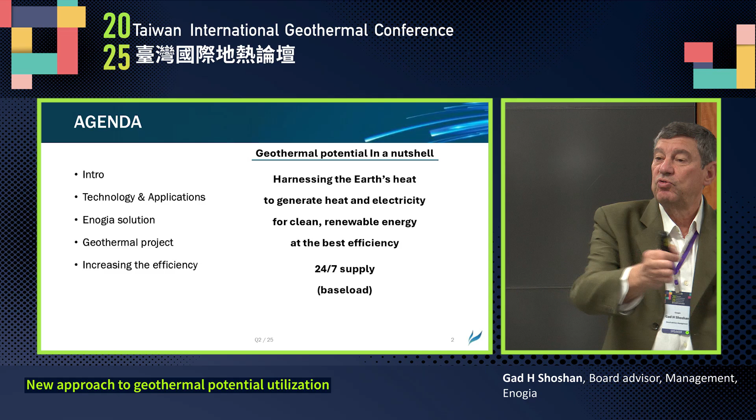I would like to start with explaining to you what is going on in the markets that we are in, which is the electrical market. Because if we don't have the wide scope, it's very hard to focus on where we can benefit. So we are right now in the middle of a revolution of the electrical market, or the energy market generally.

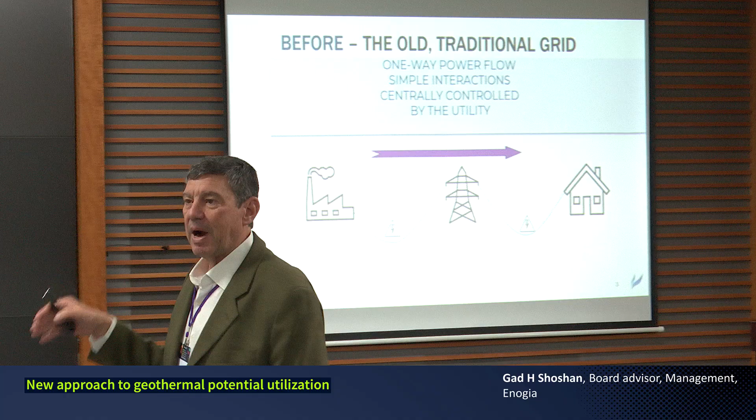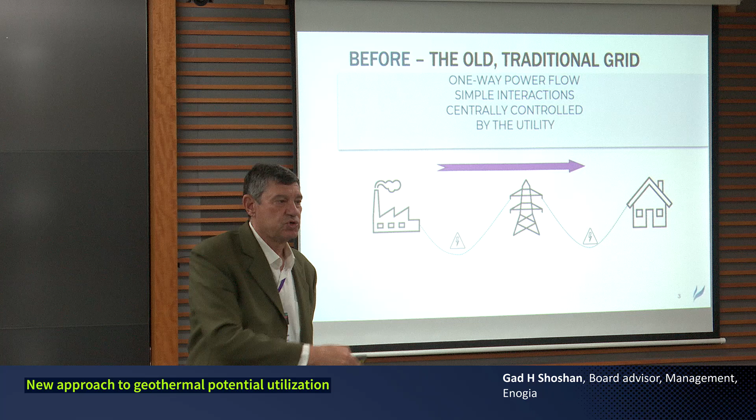We used to have the old traditional grid with huge power plants pushing everything into the consumer one way, and it is gone. The introduction of renewable energy, the diversification of production, the liberalization of the markets are changing the way we are doing business.

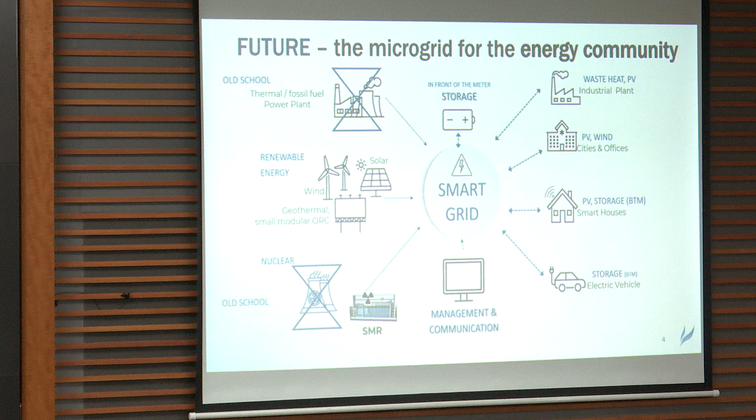Today, and especially tomorrow, what the market is going through is a concept of microgrid and energy community. You will hear more and more talks about energy community, about a group of people with a common denominator of energy production, energy consuming, and how we can help them to make sure that we are keeping diversity, efficiency, and resilience to our customers. You'll see this in a moment.

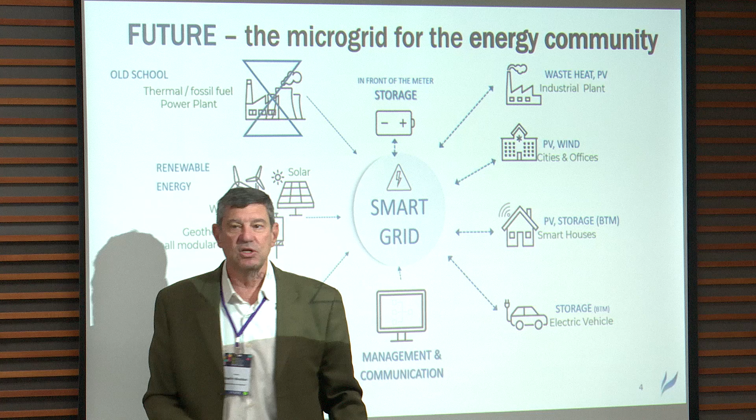The smart grid collects different kinds of production and takes into consideration the other side, which can also contribute to that. It's not anymore one way. It's both ways, and very interestingly, more and more the electrical car is becoming a player there as a storage source. Think of it, it's again a very wide version of it.

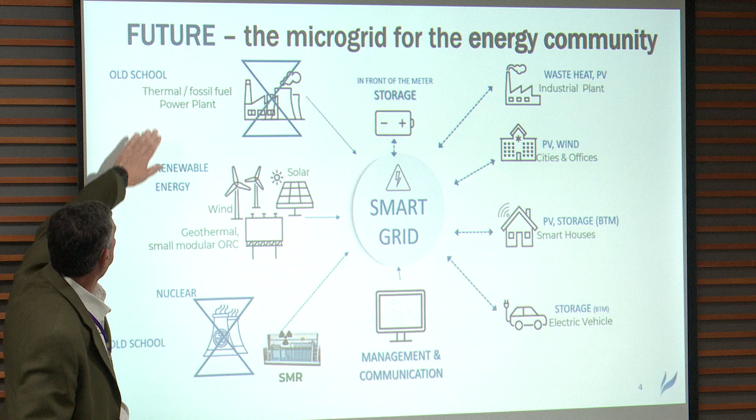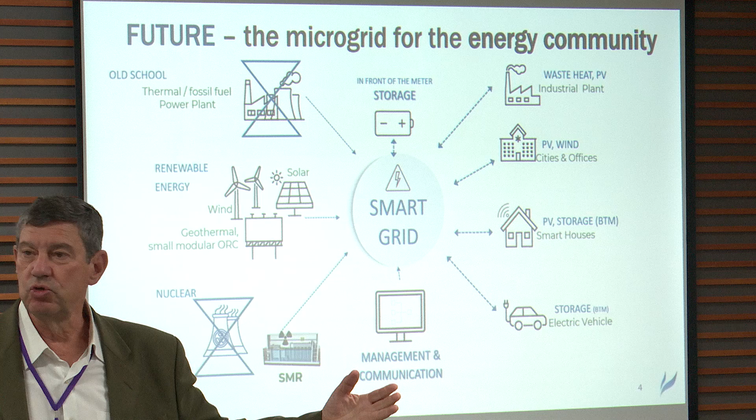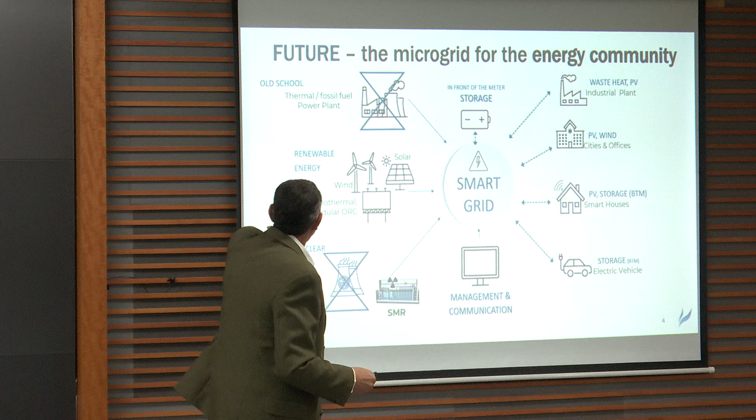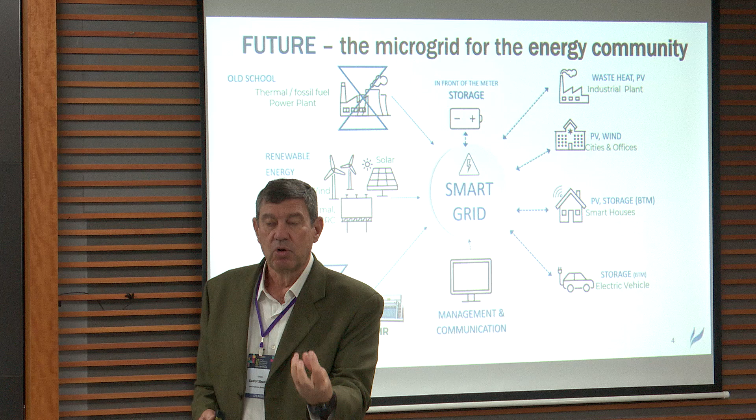It is here. You will meet it more and more because this, plus the geothermal small modular ORC, are going to be the pillar of this new smart grid. They're going to be the base load, because all the rest of them are not base load, and you need to equalize and stabilize the network. So, geothermal is a true base load and can replace or enhance wherever applicable.

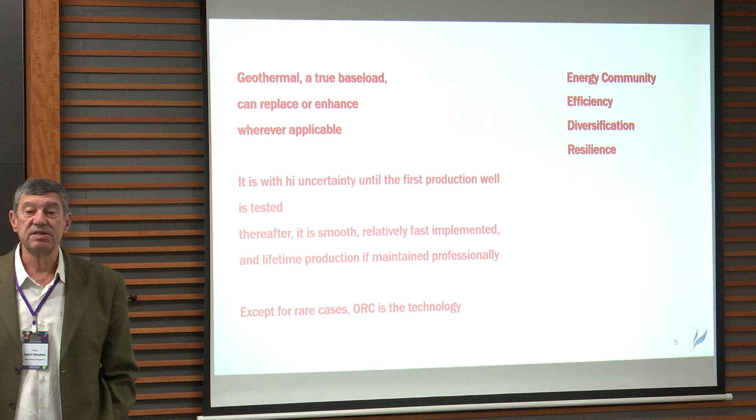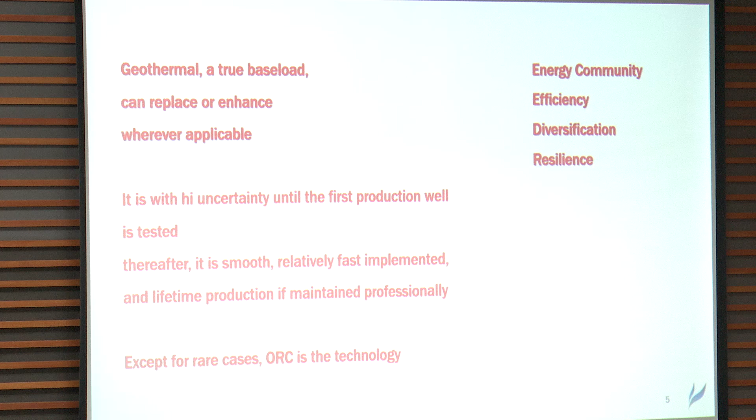Unfortunately, you can do a geothermal power plant only where there is geothermal. Yes, we all talk about AGS and EGS, and definitely it's going to be a valid solution sometime in the future when it will also be commercially available. We are getting closer and closer to that, but we are not there yet today.

Of course, the uncertainty is until the first production well. There is a lot of talk about this. I will not stay too long on this, so we don't have too much time.

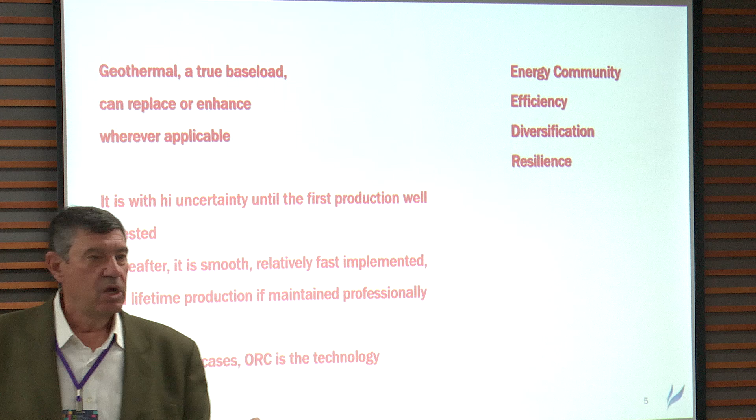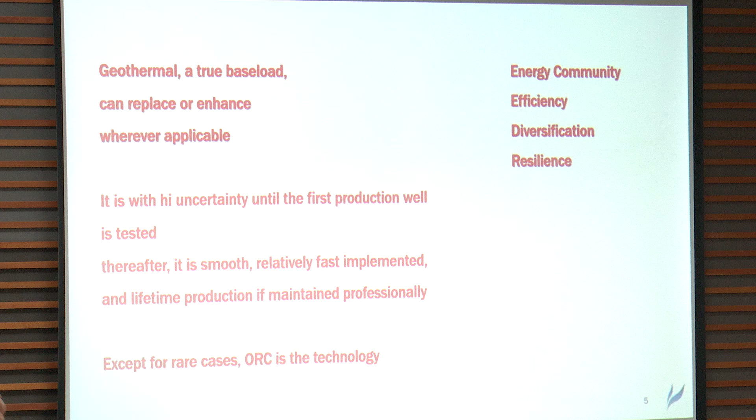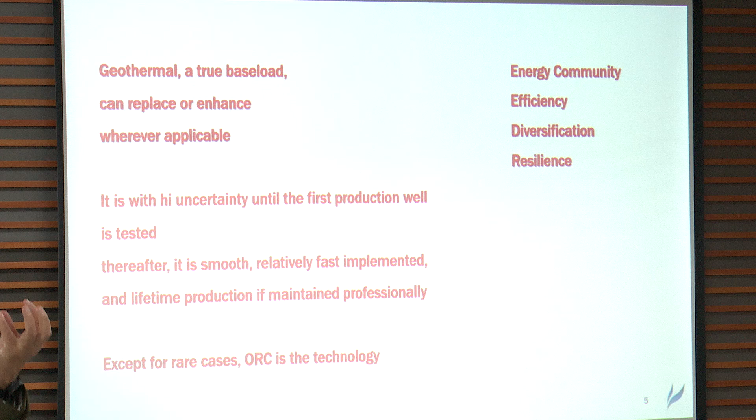Except for rare cases, ORC is the technology for geothermal. You will not find today a real flash system, definitely not a double flash system, utilized in the geothermal area. In New Zealand, which was the biggest area of double flash, you don't find it anymore. They're going for ORCs, some of them big ORCs like Ormat in Tamariki and others like that. Iceland is one of the only places where you can really find good steam that can operate a big geothermal power plant in a reasonable economical structure.

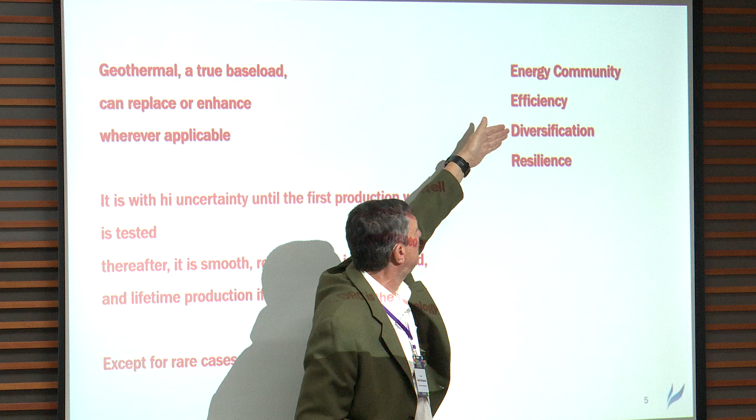So what we're talking about today is about an energy community. We're talking about efficiency, diversification, and resilience. And we are talking about how geothermal is poised to support this kind of structure, which is the future structure of the electrical market.

When we are drilling and investing in a well, the highest cost investment and the highest risk, what we would like is to have efficiency. We would like to have as much as possible from what Mother Earth gives us. And according to the depth and the temperature, we are going to have a lot of applications. It's not only electricity, and it is wrong to think that if we have geothermal, what we should do is electricity. No, what we should do is make an efficient combination solution to what we are doing.

I'm just putting here as a star the MED desalination process, which can be very easily supported by geothermal for island cases where they need fresh water, for agriculture or potable use. This is a very interesting solution. I'm pushing this for quite a while with the Greek islands, which have a real problem. I don't know, I guess in Taiwan you have enough fresh water, you don't have this issue, but it's also one of the applications for geothermal.

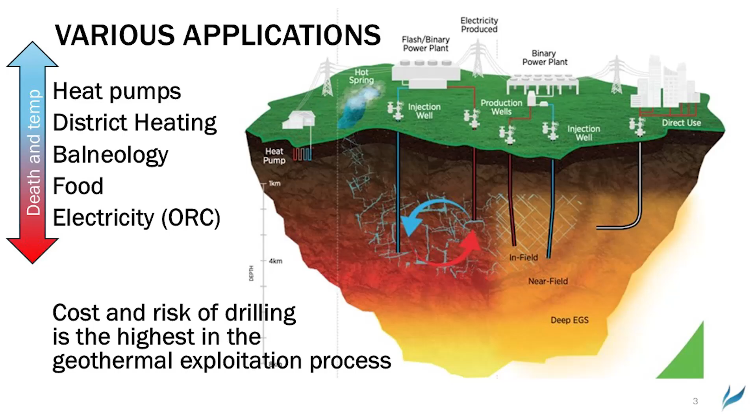So when we are developing a geothermal resource, we would like to prefer a multi-application solution. We would like to maximize the efficiency of that. We like to involve and support the local communities.

It is crucial, again, to think of the big picture. You are coming and drilling and building a power plant. It's not anymore a huge power plant somewhere where the government says, forget everything, this is the land for us. No, those are small power plants next to the communities that use them. And you find a lot of rejection because it was not explained, it is not educated, it is not brought properly to the communities, they don't understand the benefit.

Part of the efforts that companies like Enosia, like Turboden, like Ormat are taking into consideration. I know for sure, I mean I know less about Turboden, but I know Ormat, I worked there for 20 years. I know Enosia as a consultant. Community must be taken into consideration when you are developing a geothermal power plant.

You have to maintain the resource control. If you are not maintaining your resource, your geothermal project will not work properly, and you have to minimize the environmental disturbance.

We also know each well is different. Therefore, each well has to be considered for the multi-application, for the efficiency, a little bit differently. And you need the knowledge and the expertise to do that. Every well most likely can provide the multi-application, so you can do this.

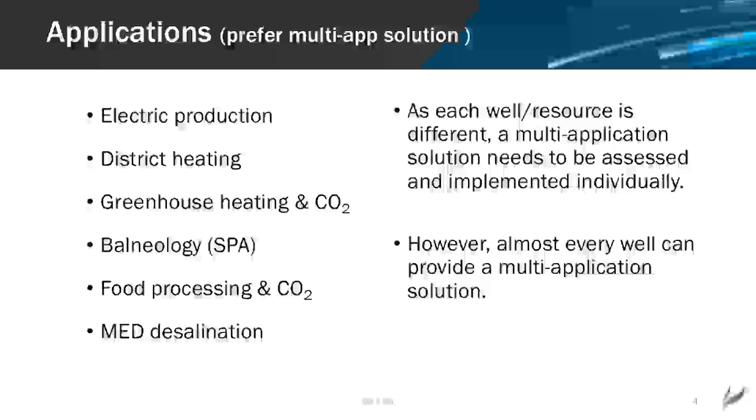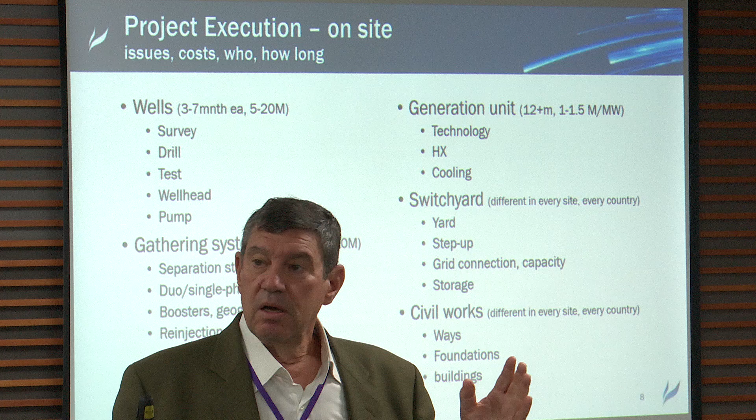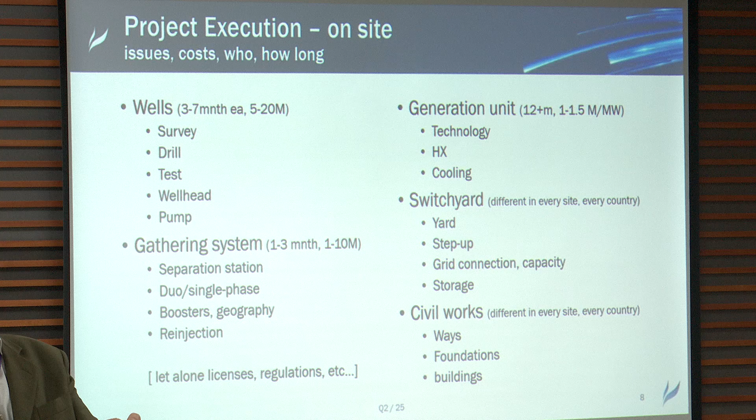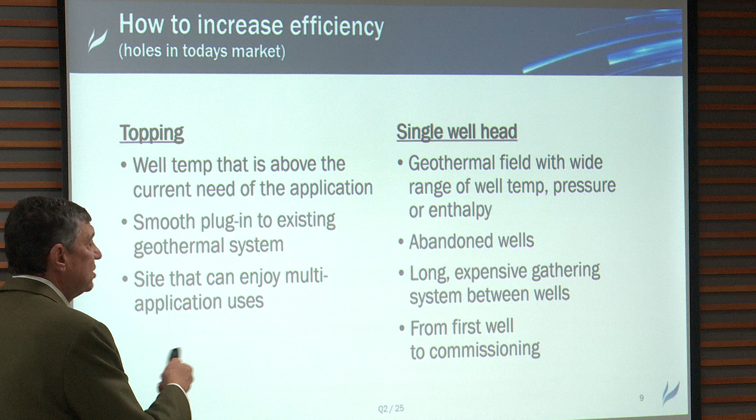Very briefly, what you can expect on project execution as far as time and more or less average cost in every phase of it. What I want to say in this slide is developing a geothermal power project is multidisciplinary, quite expensive until it is working. Once it is working, it's a honey bunny, as one of my Turkish customers used to say: I'm sitting with my legs out and just rolling the dollars like that, once it is running. So if it is properly designed ahead of time and properly executed, this is the best solution that you can get. This presentation will be available afterwards to everybody, so you can read more of that.

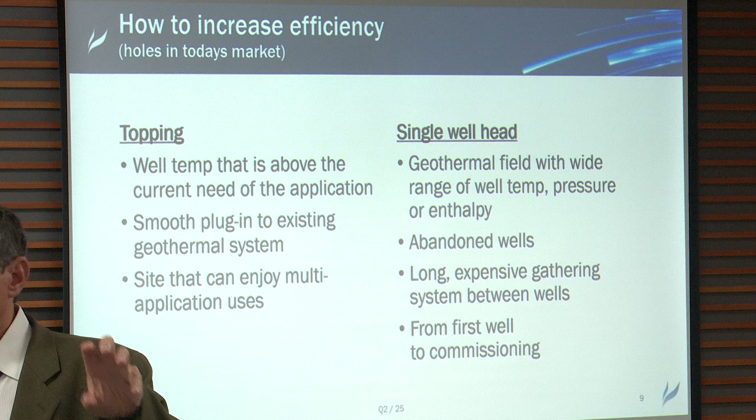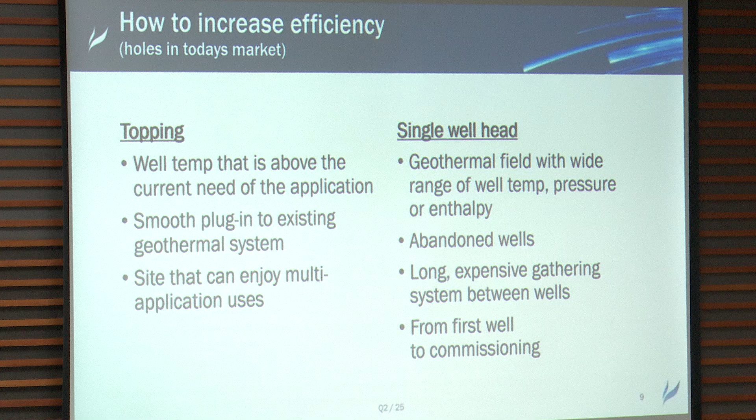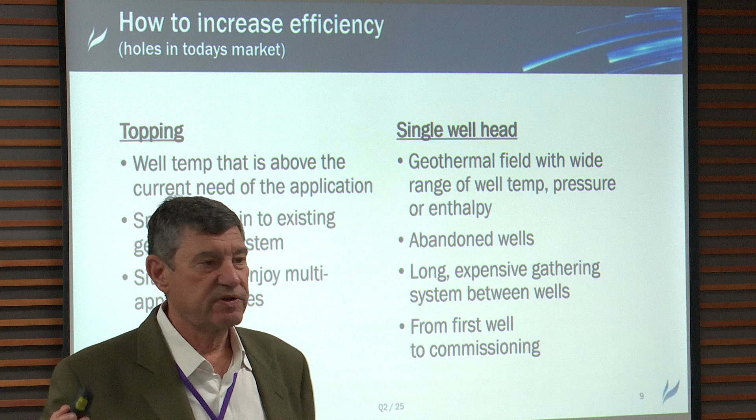So what have we developed at Enosia to suit the needs or the black holes that we found together on the geothermal market? In a moment I will tell you why the Enosia solution suits them. But we found two areas where you can quite easily do more with what you have, or what you are about to have. One is what we call topping. In many cases, you have existing wells serving existing applications where the temperature is above what you need. District heating, you need about 75 to 95 degrees to support the district heating.

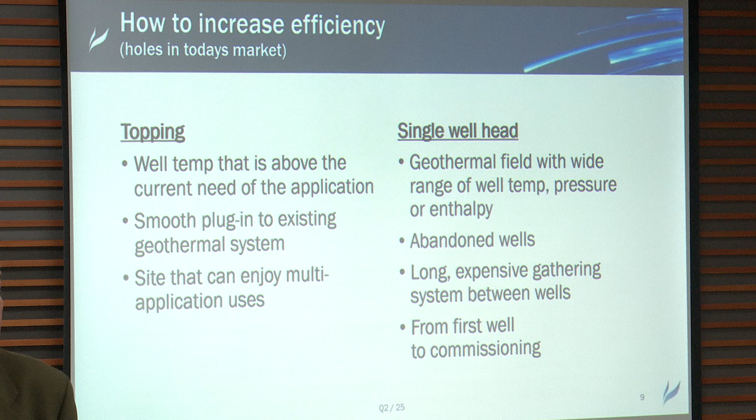I've seen wells in Iceland that are 125 degrees. For district heating, they are cooling the brine in a pool from 125 down to 95, 90 or 85, whatever they need, to suit the needs of the district heating.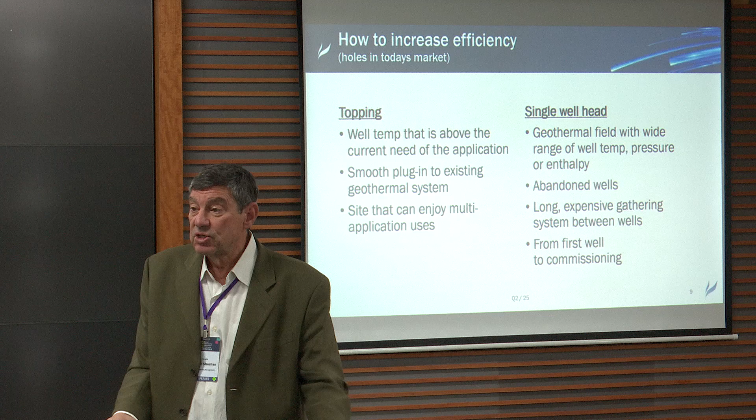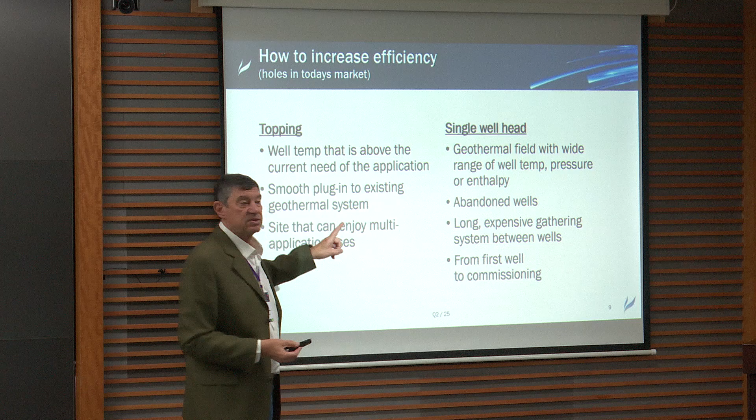Guys, you just wasted 5 megawatts of electricity here. This exists and it's very easy, a very smooth plug-in into existing geothermal systems. You just put a unit on top of the well, and instead of just cooling it, make electricity out of it.

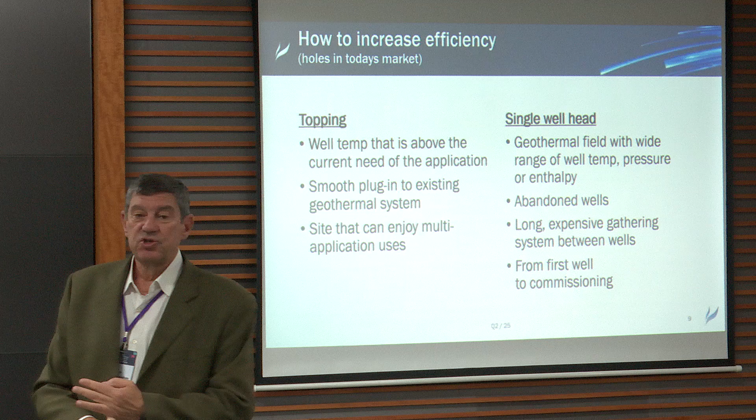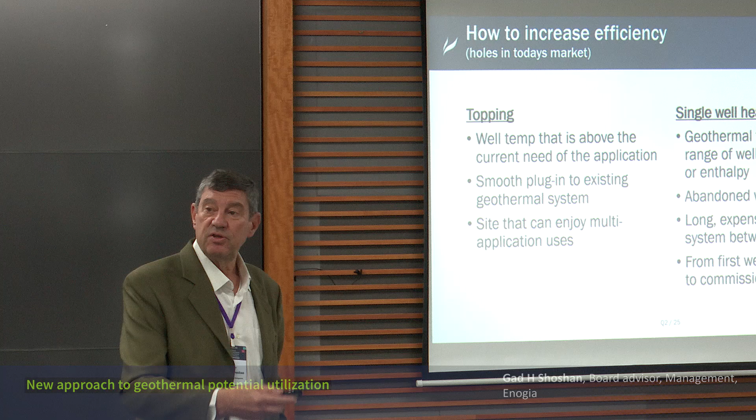True for the onsens we've seen all over Japan and spa facilities. Ormat has a beautiful solution like this in Bad Blumau, Austria, where a well supports about 200 kilowatts of electricity to the hotel, from their district heating to the spa. This is the best efficient solution I've seen in the world until now.

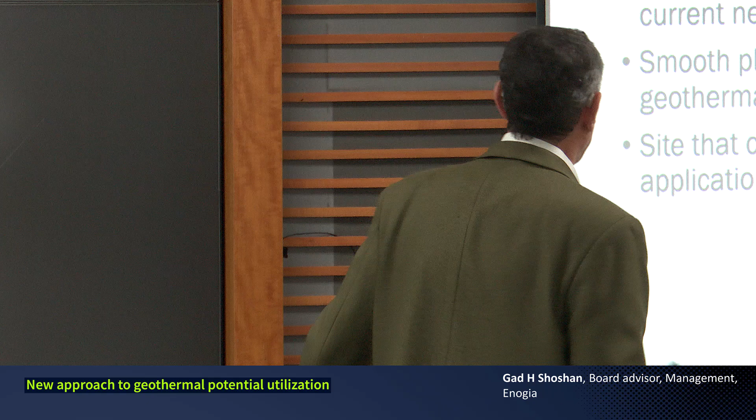We are offering something like that, very easy to implement, and it immediately joins the multi-application approach. Why is this important? At least in the EU, sites with multi-application gain incentives from the European Commission. In October 2022, the European Commission changed the regulation so you can get incentives for being efficient. Money is also important.

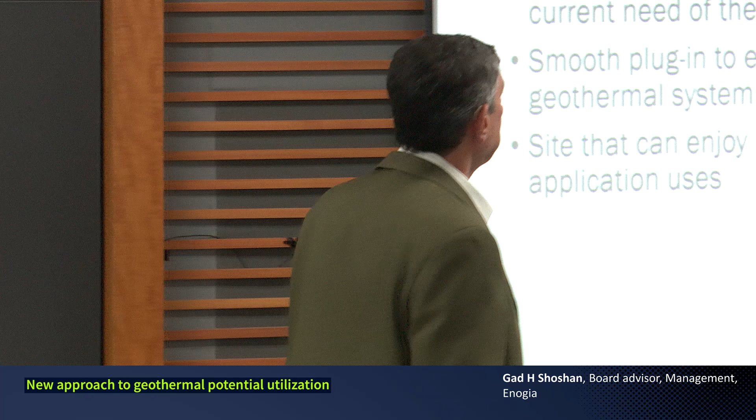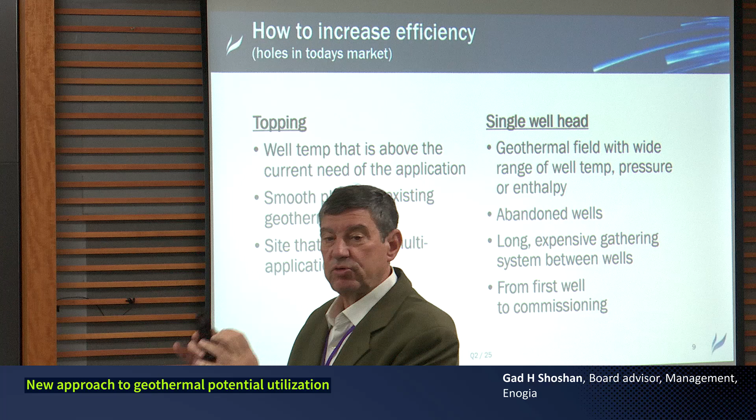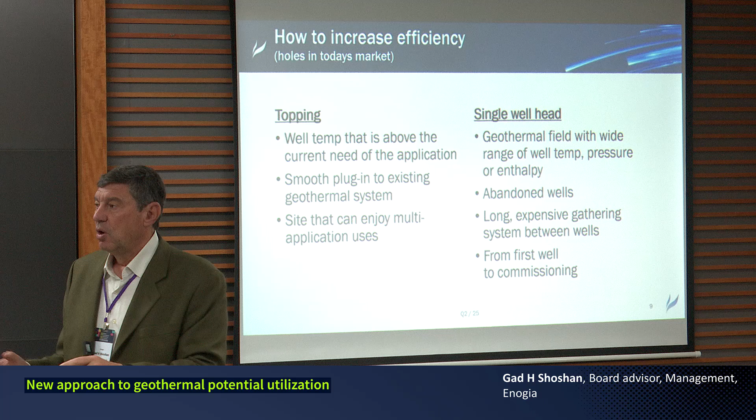The second solution we found amazingly suitable for the Enogia solution in a geothermal project is what we call a single wellhead solution. There are cases where you already have a well that either doesn't provide what you expect from the total field, or it's the only well you can drill there.

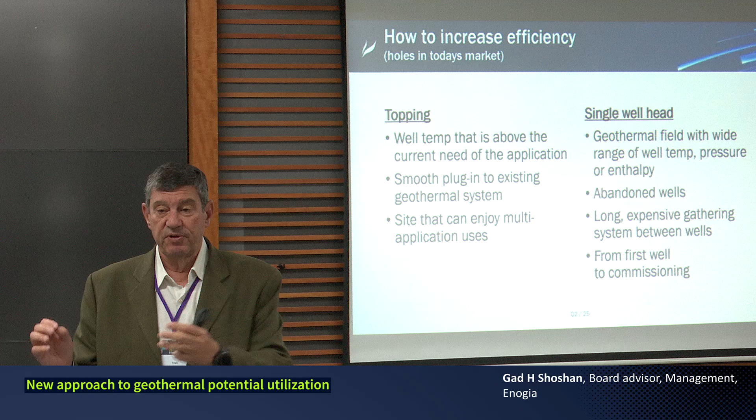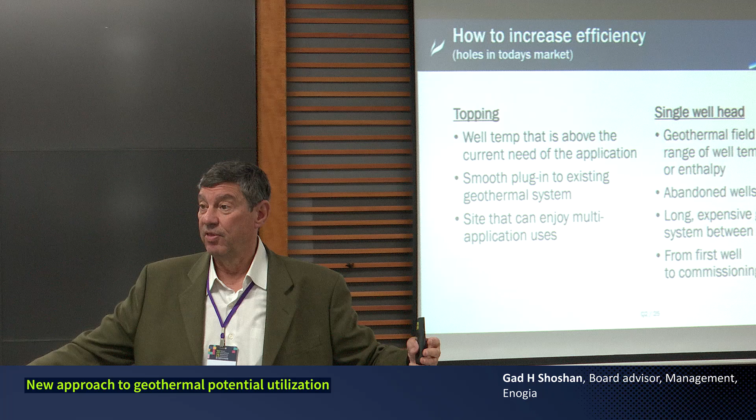If you drill another well, they're dry, or this well has been drilled and now it's going to take another 3 years until you finish drilling all the other wells to support a bigger unit. What do you do with this well? You've invested a lot of money there. You can generate electricity meanwhile or together with it, and those cases are very clear.

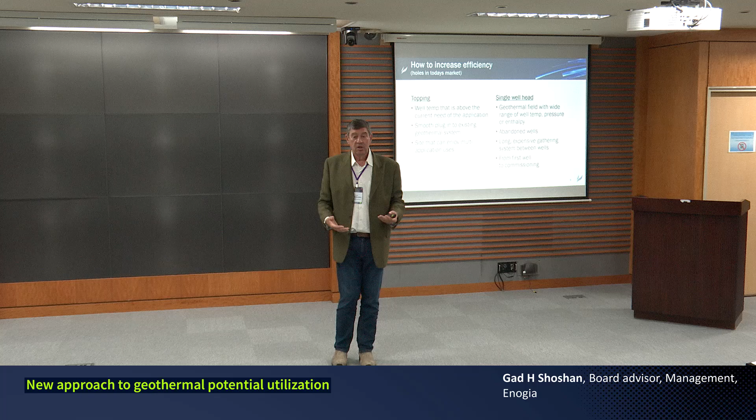We also have cases in oil and gas where gas wells extract hot water along with gas, and that hot water is being wasted. It's another application for a single wellhead solution—taking a well and just putting one unit on top of the wellhead. You save a lot on gathering system cost, and you start producing electricity much faster, or even capture value that wasn't considered before, on something you already invested in.

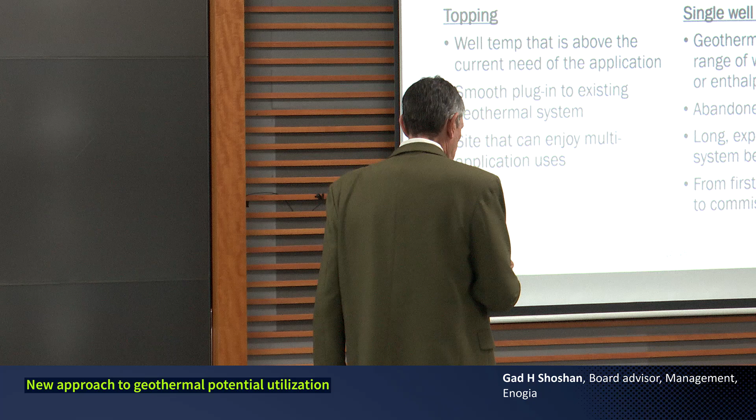So today, when introducing Enogia into the geothermal field, we come with two concepts which have to be examined case by case, as you always must with a geothermal project: either a topping solution or a single wellhead solution.

Now I'm focusing more on why Enogia, and this is where I'm starting my sales pitch. Till now it was marketing—like me being a teacher or lecturer at the university, which I do recently.

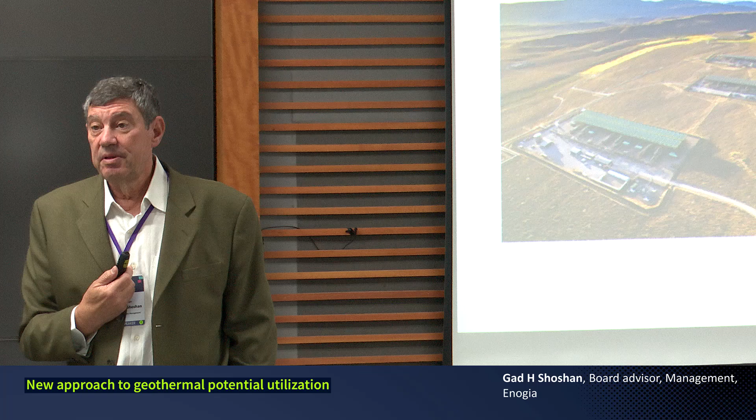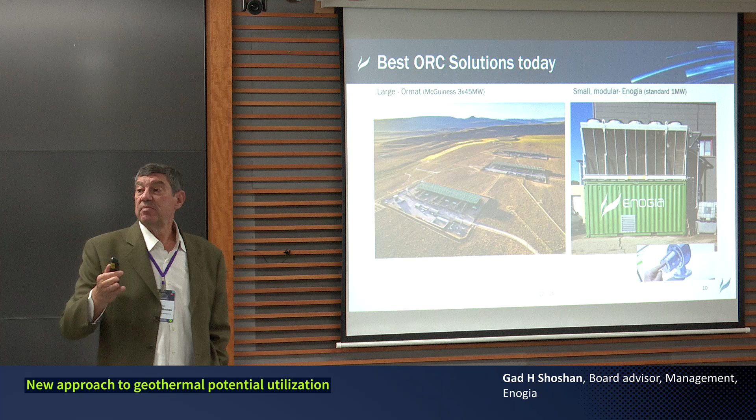For me, the best ORC solution that exists in the market—I'm sorry, door number 3—for large ones, if you're talking about a large ORC solution, it's Ormat. We know Ormat has excellent solutions, let's say 10 megawatts and above. And if you talk about small ones, it's Enogia. This is an example of an Enogia 1 megawatt unit, containerized and very easily implemented in the field.

So, looking at each project by itself and the project phase, personally I think you should go to either one of them. But that's my opinion—you may have a different one.

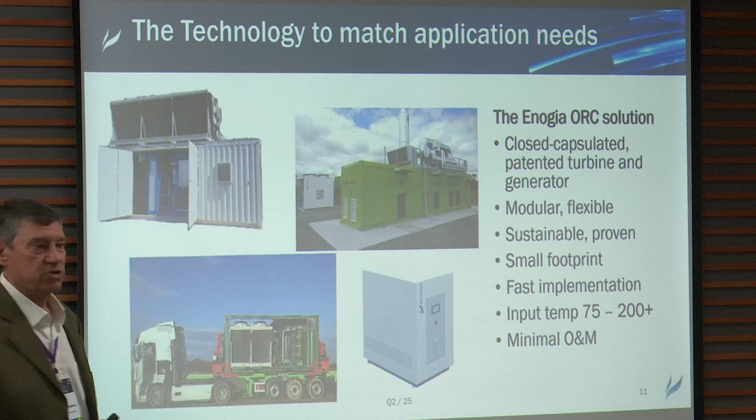What is the technology that matches the application needs of Enogia? These are some samples, and this is one of the more interesting ones I've seen from them. When I retired from Ormat after 20 years and they asked me to consult for them, I saw it for the first time and felt, wow, this is the part that was needed to complete the picture. We're talking about a closed, encapsulated, patented turbine and generator.

We're talking about a very small turbine, high speed, encapsulated in something like that size, okay? With the generator inside, with the motive fluid inside, nothing comes in and out except the heat coming in and the electricity coming out from the generator. All this is containerized with heat exchanger, with a pump, and with a little bit of electrical control, of course.

It has a modular approach. You can put many units one next to the other. You have several sizes, we'll see in a moment. It's a very small footprint. Nothing is coming out of it. It's excellent to implement in areas where you have nature reserves or much more environmental concerns.

It is very fast in implementation because it's all capsulated, containerized at the manufacturing site, delivered to the site. If all the civil works are ready, if all the connections for the resource are ready, you're talking about a few days of implementation and start to operate.

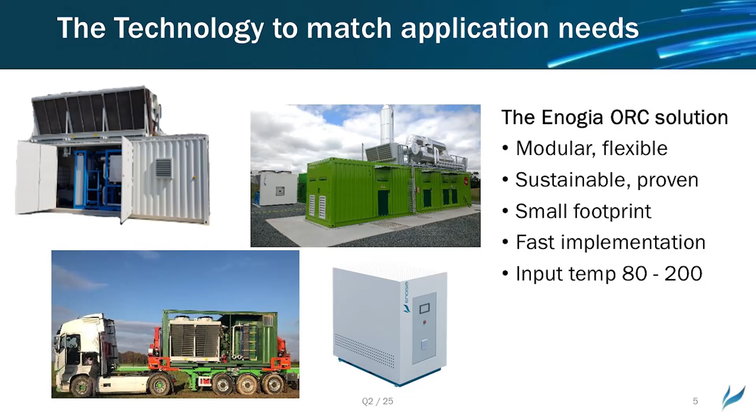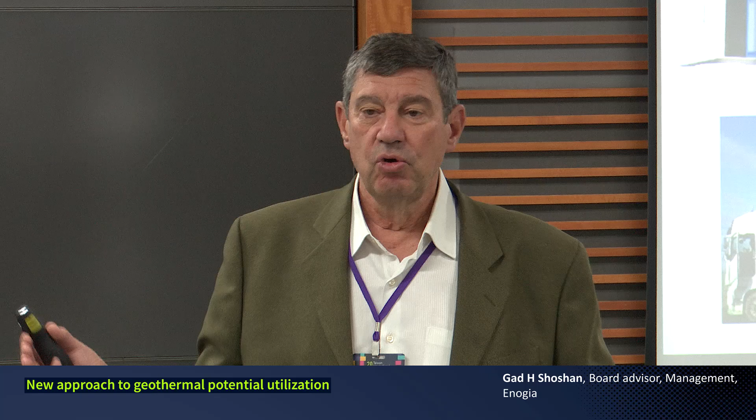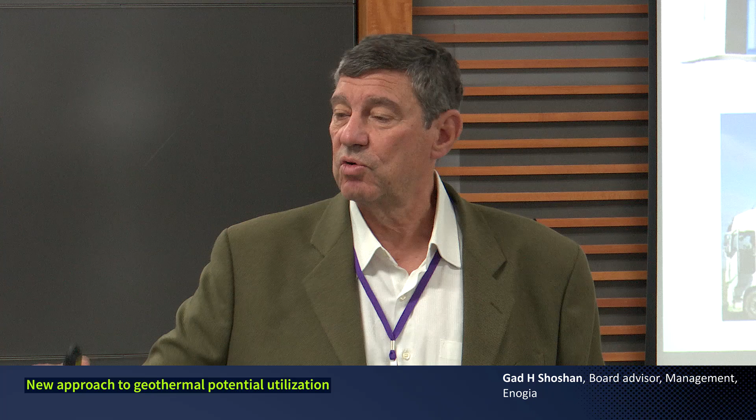Enogia's solution can start generating electricity at a temperature of 75 degrees. This is what was mentioned before when Sam was here in the morning and asked, what would you do with wells that are 100 degrees, 110 degrees? You will generate electricity with them. And you will design solutions that give you district heating at 75 or 80 degrees, but you still generate electricity from them.

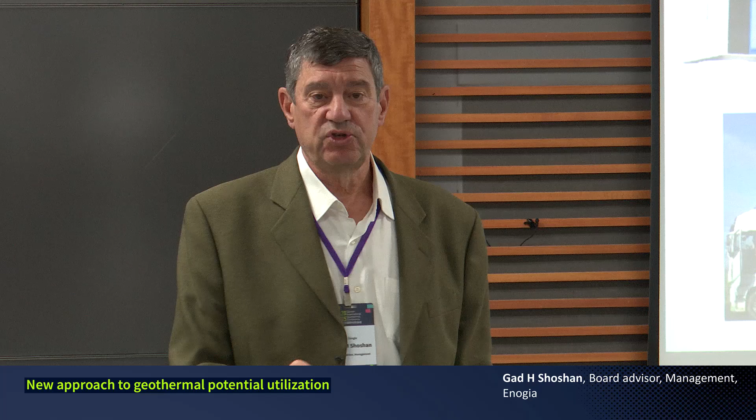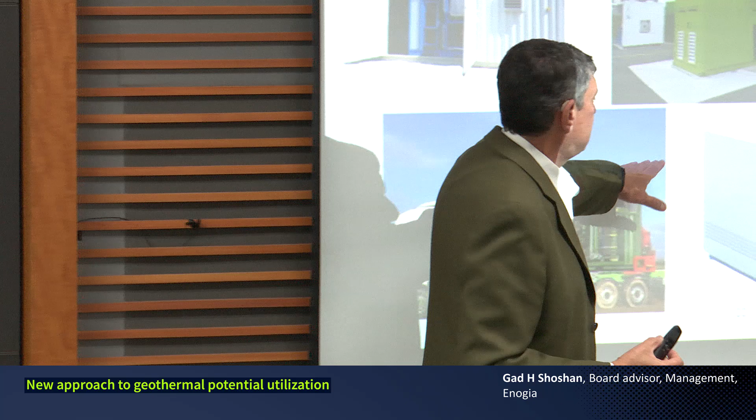You have a solution for a lower temperature, an economical solution, a valid solution, and a proven solution, because Enogia has more than 200 sites over 30 countries around the world - not all of them, very few in geothermal, most of them in other areas, but this is where you have it. This is the center of one of the solutions, this is another one, another one just to see.

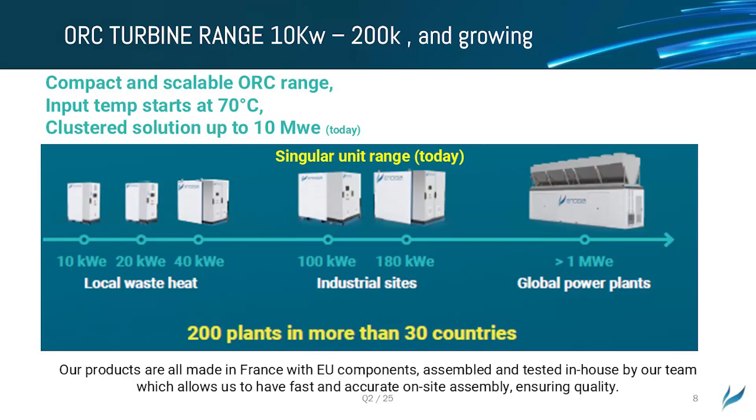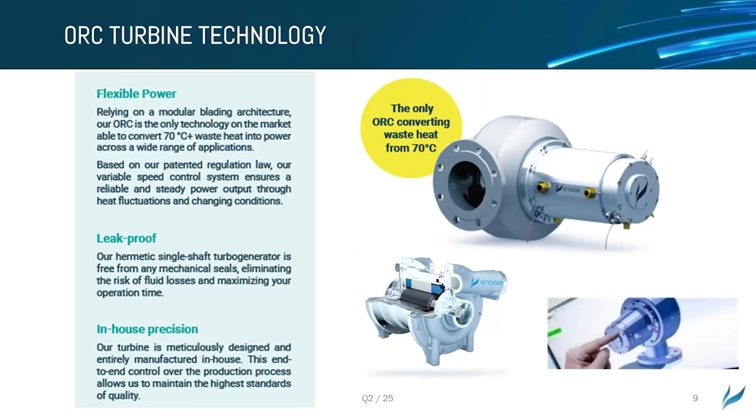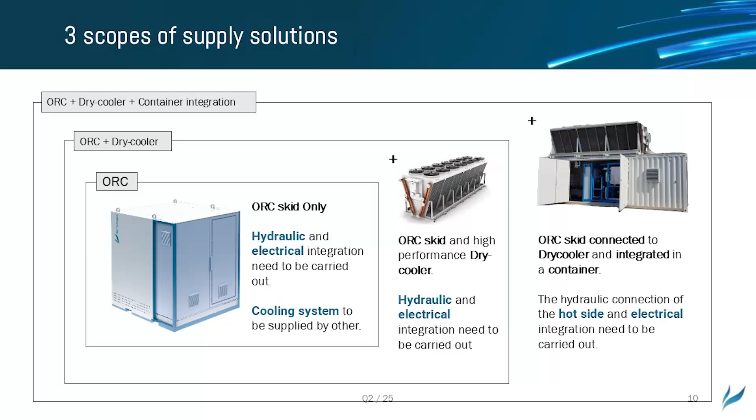Currently there are three approaches to supplying the market. You can either get only the ORC with the skid, you can get it with the dry cooler, or you can get it all containerized. The reason for these three stages is because in many cases, if you do it locally, it will be cheaper. So definitely you will not do this part locally, but if you want to do other parts of it locally, it will be cheaper. And this is thinking of the end user at the end of this.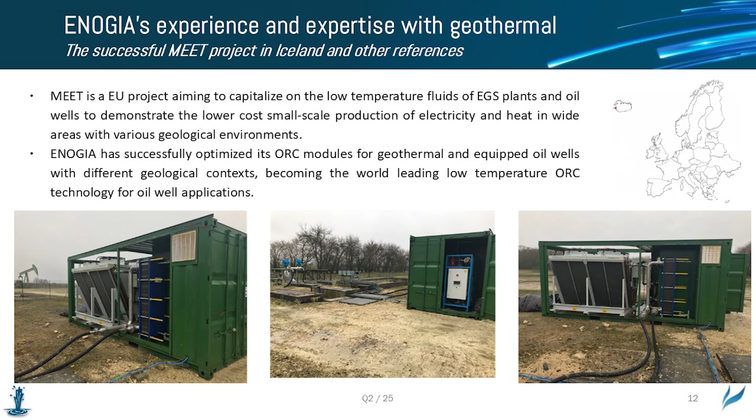To summarize in a nutshell, to help you remember - and we have also a one-pager over there you can go look at - we are talking about increasing the utilization and efficiency of geothermal projects by either doing a topping solution or a single wellhead solution. Remember those phrases because they will be part of your future vocabulary. Topping means taking the high level of the temperature of what is already existing and plugging in there the generator, or a single wellhead.